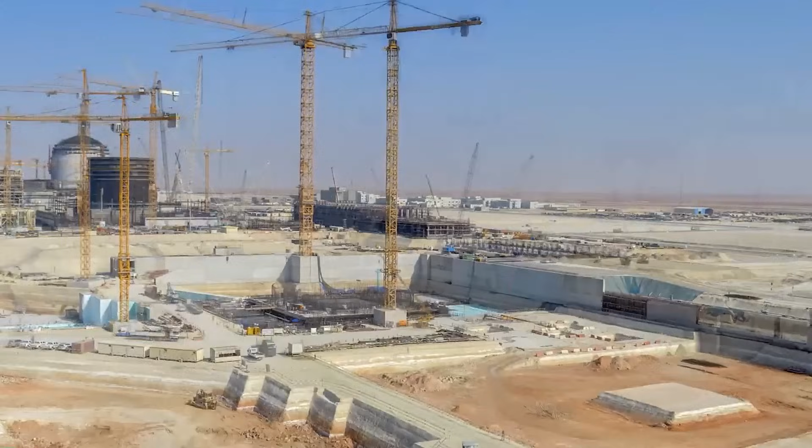These are the world's most audacious energy experiments, bold bets on technologies that could power the next century. From fusion reactors trying to capture the power of stars, to advanced nuclear plants rising in desert sands, brilliant minds are pushing the boundaries of what's possible in energy. Some will revolutionize how we power civilization. Others will teach us what doesn't work yet. But all represent humanity's boldest attempt to engineer the energy of the future. This is the story of 8 megaprojects building the energy of tomorrow.

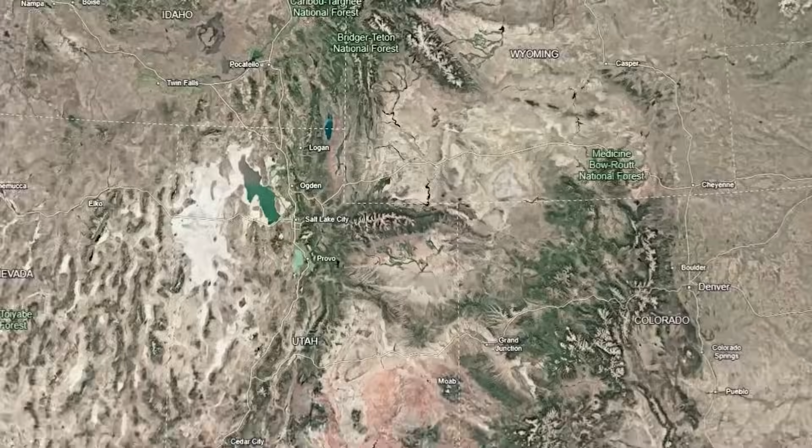And it starts with Microsoft's co-founder betting $2 billion on nuclear technology that's never been tried before. America's nuclear comeback isn't happening in a lab or on blueprints. It's happening in the Wyoming desert, where Microsoft co-founder Bill Gates is betting $2 billion on the most advanced reactor design in decades. This is TerraPower Natrium, and it's not just another nuclear plant. It's a completely different approach to atomic energy that could change everything.

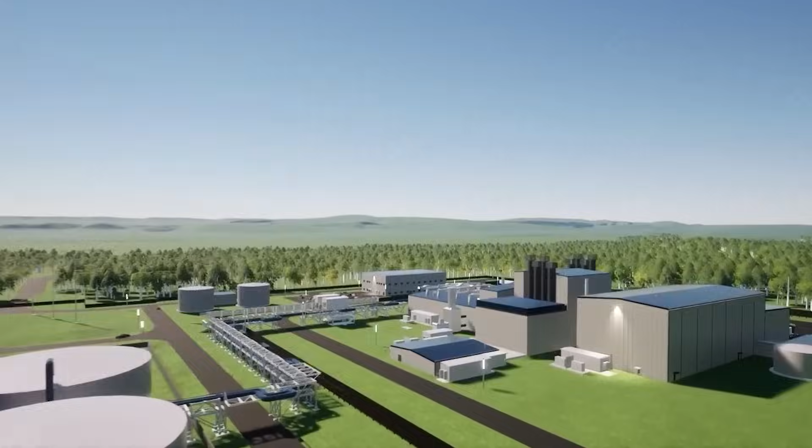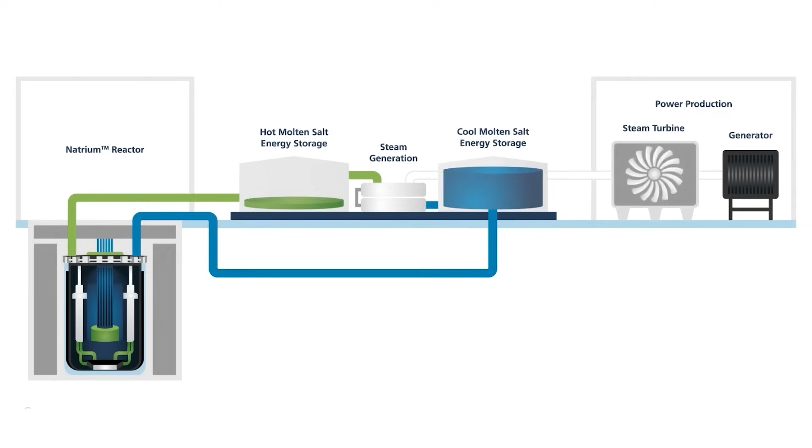While others build conventional reactors with pressurized water, TerraPower uses liquid sodium as coolant. While others struggle with energy storage, Natrium comes with a built-in molten salt battery that can store energy for hours and boost output by 50% when the grid needs it most. The reactor produces 345 megawatts normally, but can surge to 500 megawatts using its integrated storage system, like having a nuclear plant and battery system in one package.

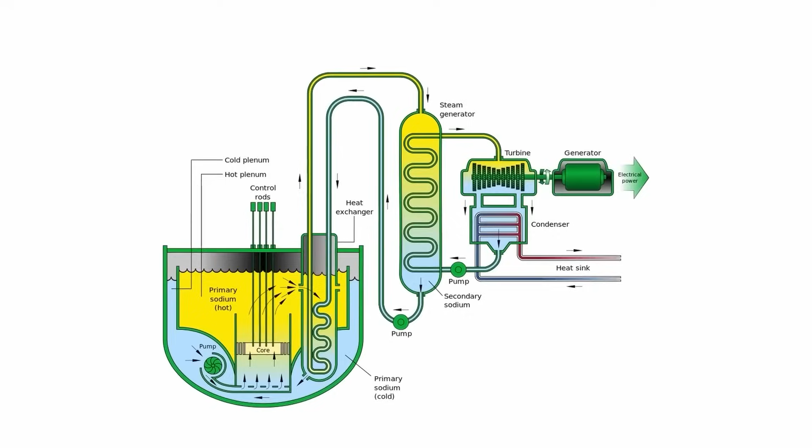Construction began in June 2024 on the site of a retiring coal plant in Kemmerer, Wyoming, a perfect symbol of America's energy transition. The same community that once powered the nation with coal will soon power it with advanced nuclear technology. TerraPower isn't just building a reactor, they're proving a concept.

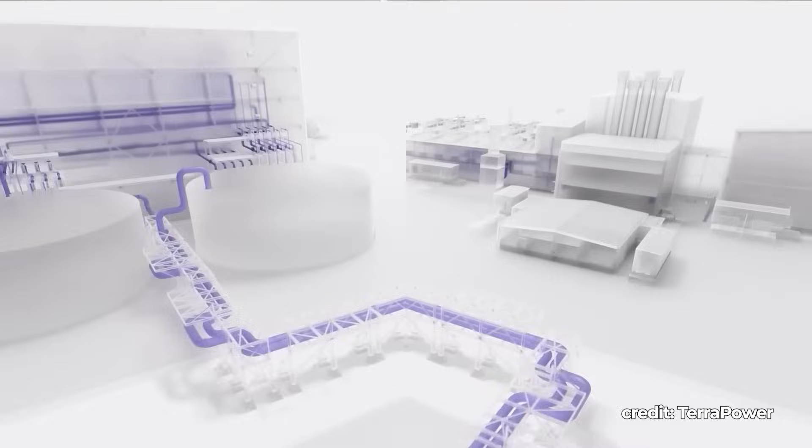Sodium coolant operates at normal atmospheric pressure, eliminating the risk of explosive steam releases. The liquid metal transfers heat more efficiently than water, and if power is lost, the system shuts down automatically without external intervention. Bill Gates has been working on this design for over 15 years, pouring hundreds of millions into research and development.

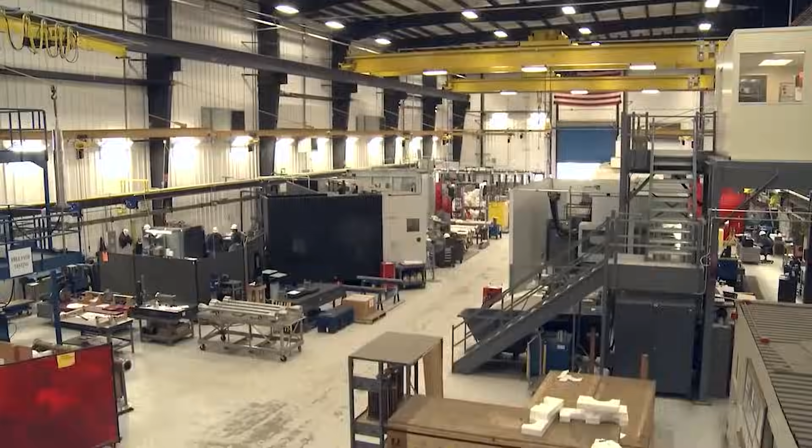The Department of Energy committed up to $2 billion in federal support. Private investors added another $830 million. But the real innovation is the business model. Instead of building each reactor from scratch, TerraPower plans to manufacture standardized components in factories, then assemble them on site. It's nuclear power meets mass production.

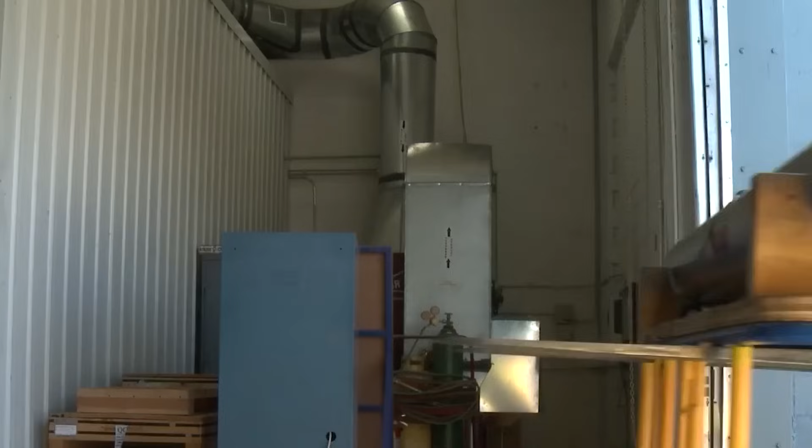If it works, Natrium won't just power 400,000 homes in Wyoming. It could become the template for replacing America's aging coal fleet with advanced nuclear technology.

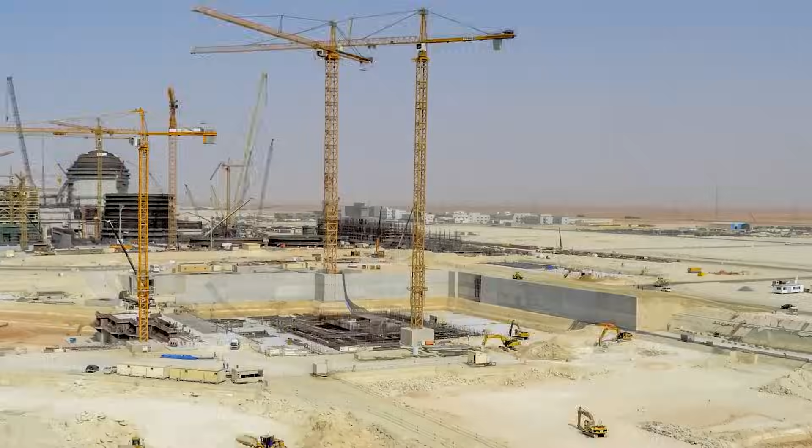While America bets big on sodium and molten salt in Wyoming, something even more extraordinary was already rising from desert sand 7,000 miles away. The United Arab Emirates built not one but 4 nuclear reactors, right in the heart of the desert during a global pandemic and ahead of schedule. This is Barakah, the Arab world's first nuclear plant and quite possibly the fastest nuclear construction project in modern history.

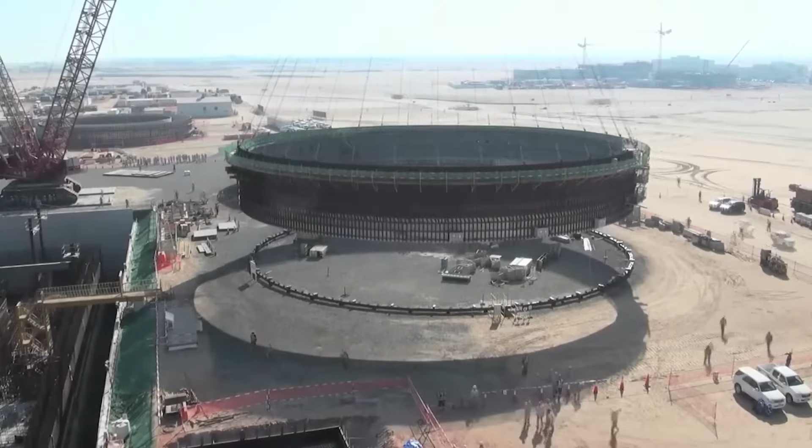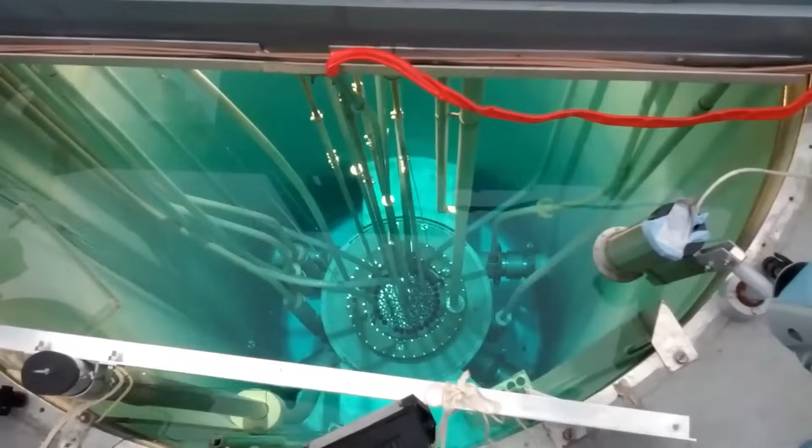But speed wasn't their only advantage. While Western nations debated policy and red tape, the United Arab Emirates went from approval to full-scale construction in under 3 years. 4 Korean-designed APR 1400 reactors, each producing 1,400 megawatts, built in the middle of a desert with cooling systems adapted to blistering heat and salty sea air. The design was chosen for reliability, not experimentation. South Korea's proven APR 1400 pressurized water reactor, a model already operating successfully in South Korea.

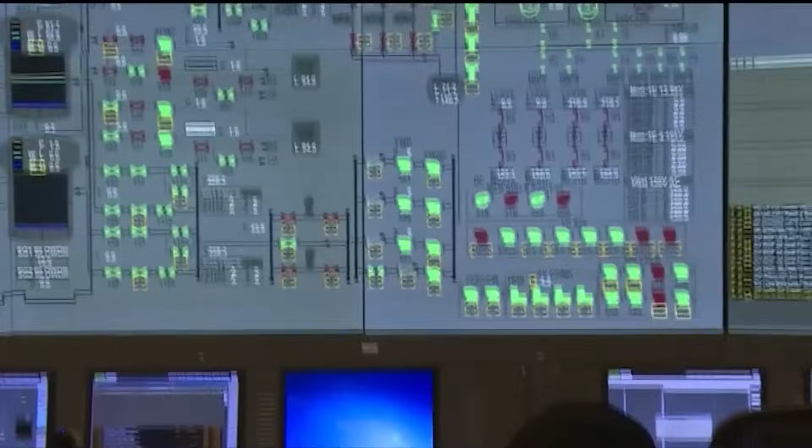Barakah's site was flattened, reinforced, and prepped in 2011. Just 2 years later, construction was already underway. Building nuclear reactors in 50 degrees Celsius heat required specialized concrete mixes, advanced cooling strategies, and careful coordination with seasonal sandstorms. Engineers had to design intake systems that could handle salt corrosion and thermal expansion in extreme conditions.

By 2020, the first unit began delivering power. Today, 3 out of 4 reactors are online, feeding electricity into a national grid once powered almost entirely by fossil fuels. The final unit is approaching completion. This isn't just about keeping the lights on, it's strategy. The UAE wants to diversify from oil, cut carbon emissions, and become a net energy exporter, not just in barrels, but in kilowatts. Barakah supplies up to 25% of the country's electricity, displacing natural gas and setting the stage for hydrogen production and water desalination.

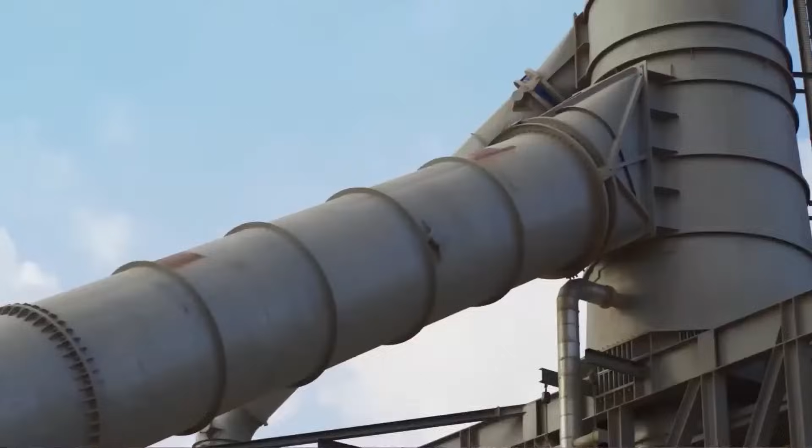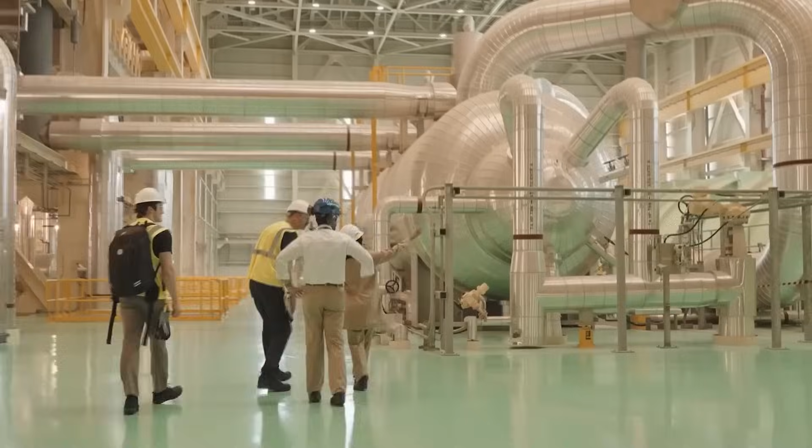Built at a cost of $24.4 billion, the plant required workforce training, regulatory cooperation with the IAEA, and building a nuclear oversight body from scratch. The UAE even sent dozens of engineers abroad for specialized training. Barakah proves nuclear can work, fast.

But what if you could make it even safer? What if you could build reactors that literally cannot melt down? China thinks they have the answer, and it involves something the West threw away 50 years ago.

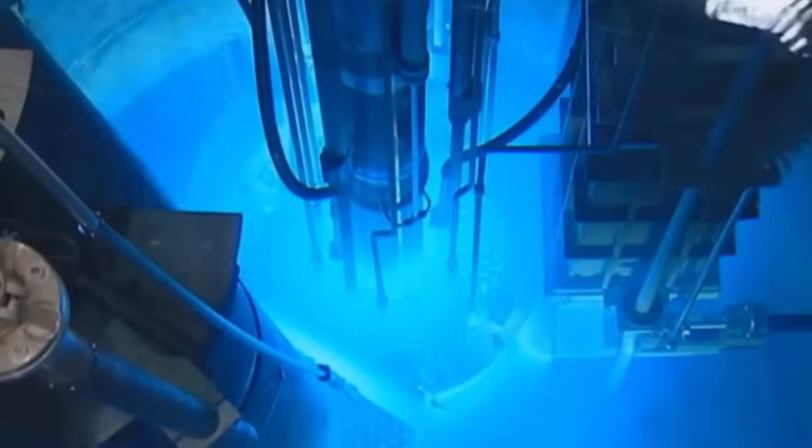Hidden in China's western desert sits a reactor that doesn't look like any other nuclear plant on Earth. No giant cooling towers, no pressurized water. Instead, it runs on molten salt and an element America tried in the 1960s and abandoned.

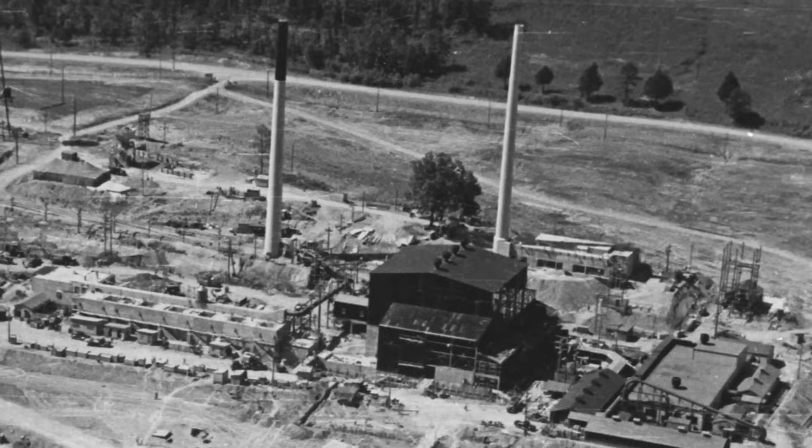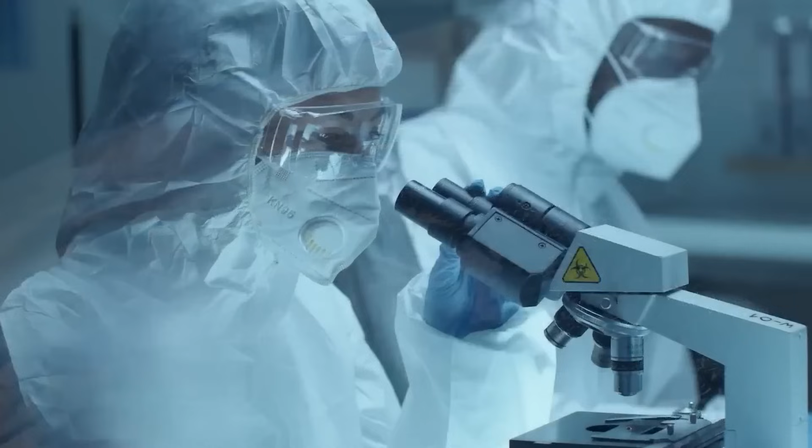If this tiny prototype works, it could make every other reactor in the world obsolete. But there's a catch, one that killed the technology once before. In the deserts of Gansu province, far from China's megacities and coastal power plants, sits TMSR LF1, a small, unassuming reactor tucked into the highlands of Wuwei. It doesn't look like a revolution, but it might be one.

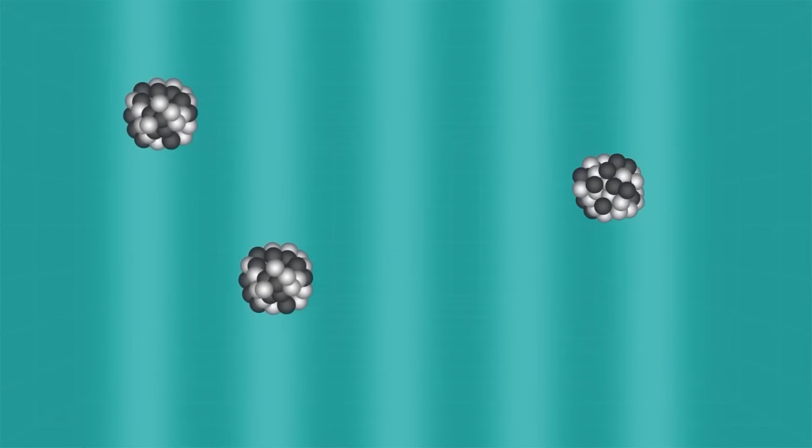Instead of uranium rods submerged in pressurized water, this prototype uses molten salt as both fuel and coolant. The fuel, thorium mixed with enriched uranium, is dissolved directly into the salt. If it works, it won't need a massive water source. It won't melt down. And it could run on thorium, an element China has in abundance.

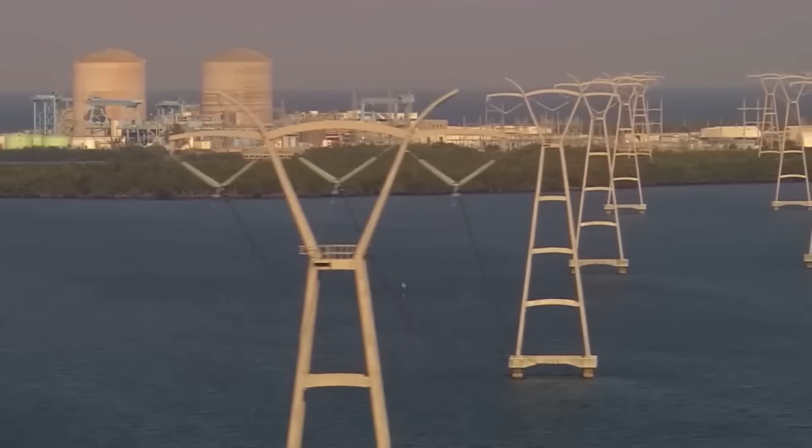It's not China's biggest reactor. It's not even connected to the grid. But in terms of long-term strategy, it's one of the country's boldest energy plays. Because if they can make molten salt reactors viable, they could reshape nuclear energy from the ground up. Safer, cleaner, and immune to the water wars that plague conventional plants.

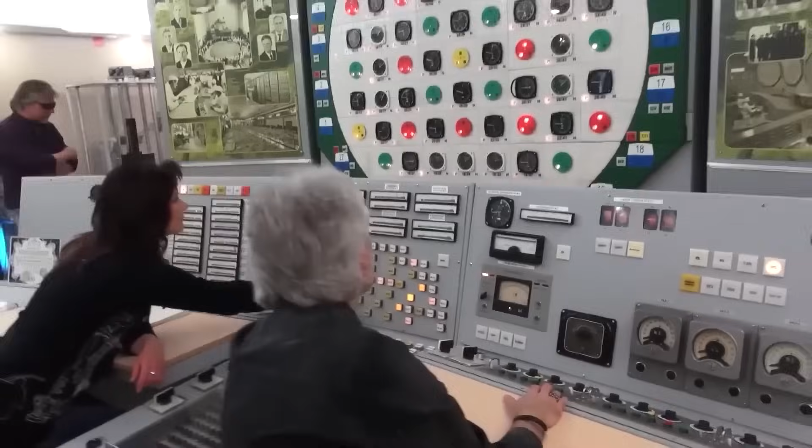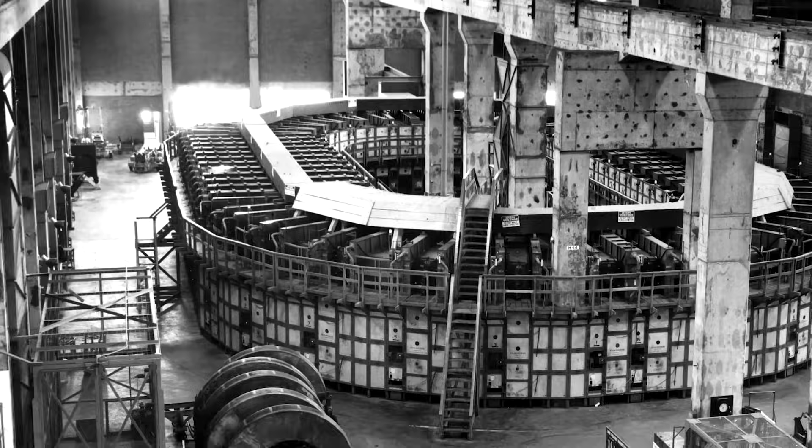But here's the risk. Molten salt designs have been tried before. The US built one back in the 1960s at Oak Ridge. It worked briefly and was shelved. The salt corroded the pipes. The complexity overwhelmed the engineers.

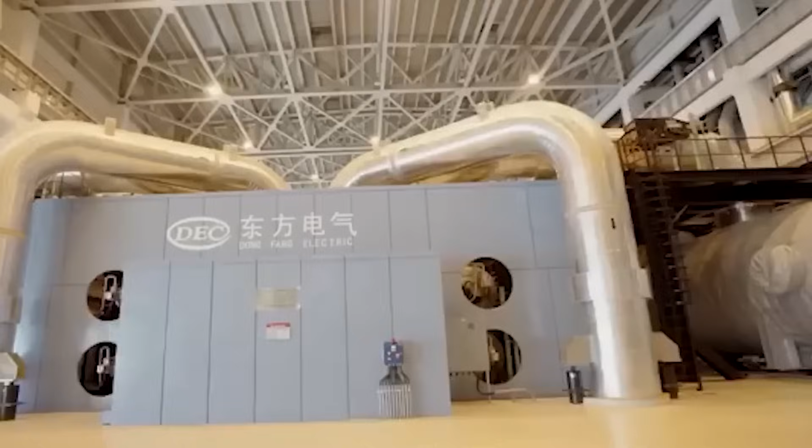The world moved on. Now, China's picking up where others left off, betting that better metallurgy, advanced sensors, and centralized planning can finish what others abandoned. The first version of TMSR LF1 began testing in 2021. It's tiny, just 2 megawatts, but it's a testbed for something much bigger: a 373-megawatt commercial reactor already under development.

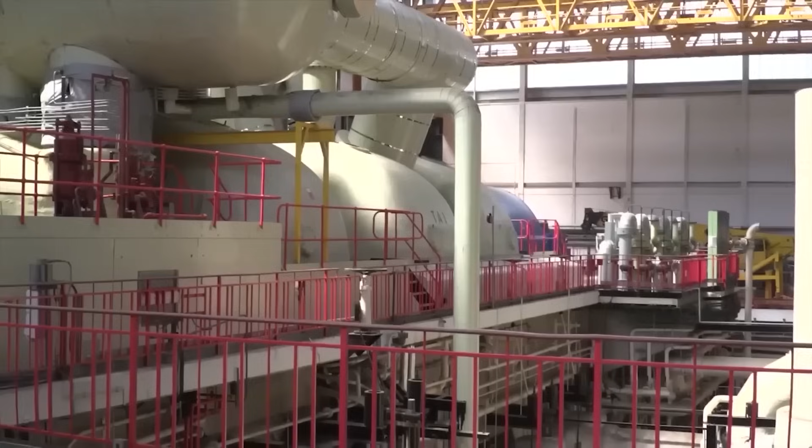Success here would give China a foothold in next-gen nuclear, one that doesn't rely on uranium imports, sprawling cooling systems, or Western technology, one that fits neatly into their broader energy roadmap: secure, scalable, and exportable. But if molten salt reactors seem impossible, what we're about to see next is trying to bottle the power of stars themselves. And the price tag? It'll make China's experiment look like pocket change.

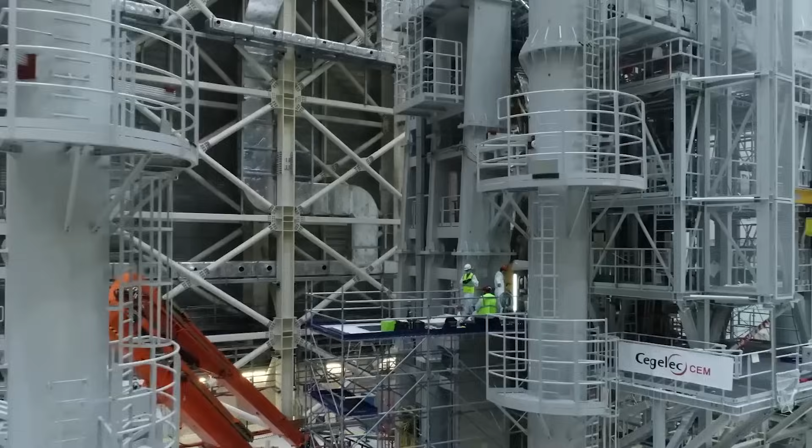What if I told you that right now, in southern France, 35 countries are building a machine to hold plasma 10 times hotter than the sun? Not in space, not in a lab, but in a steel chamber the size of a cathedral. This is ITER, the most ambitious scientific project in human history. It's already cost over 25 billion euros. It's a decade behind schedule, and it might be humanity's best shot at unlimited clean energy.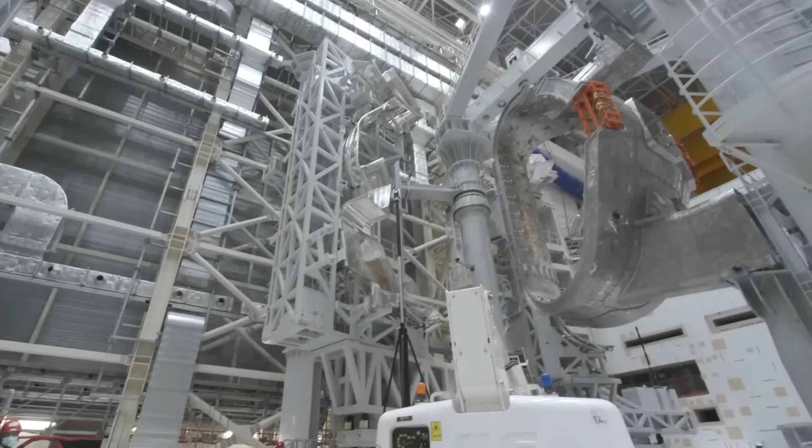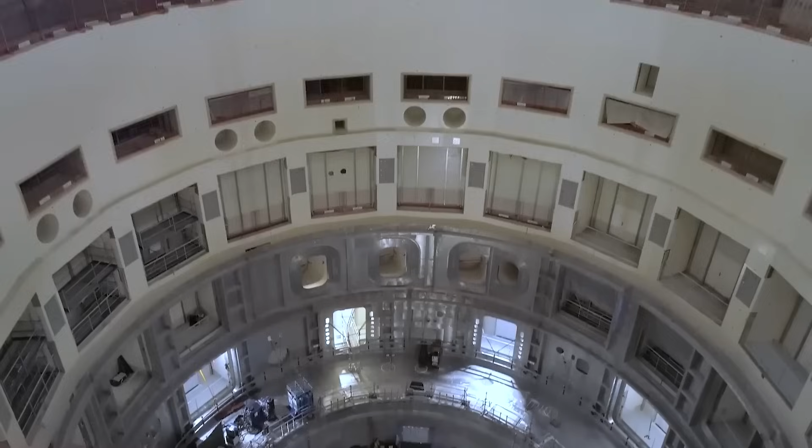What if you could hold a star in a steel jar? That's the dream, burning quietly in southern France, where the largest fusion reactor on Earth is coming to life. It's called ITER, Latin for 'the way,' but its path has been anything but smooth. Beneath its 73-meter steel building lies the heart of an idea humanity has chased for over 70 years: nuclear fusion, the same process that powers the stars.

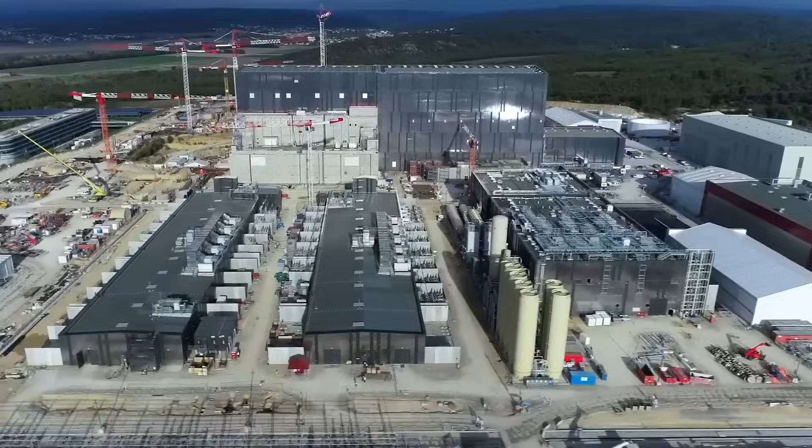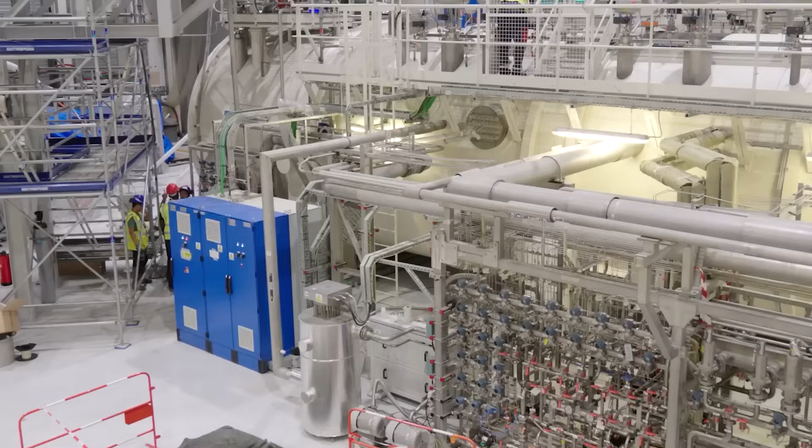A fire that doesn't burn fossil fuels. That leaves no long-lived radioactive waste. That can't melt down or be weaponized, if it works. ITER isn't just a reactor, it's the largest scientific collaboration in human history. 35 nations, including China, the US, Russia, and the EU. Built with over 10,000 tons of superconducting magnets, cooled to colder than outer space. 1 million components shipped from all corners of the world, assembled like a cosmic jigsaw puzzle with millimeter precision.

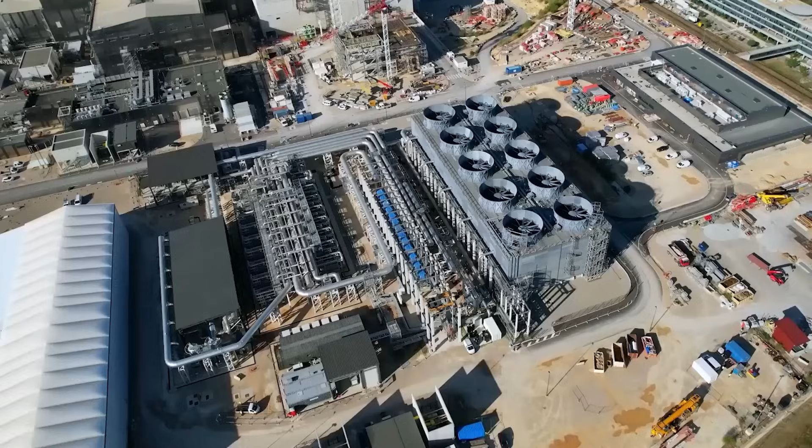But here's the tension. ITER doesn't generate electricity. It's an experiment. A 25 billion euro bet that we can confine plasma at 150 million degrees Celsius in a magnetic field, long enough to prove fusion is viable at scale.

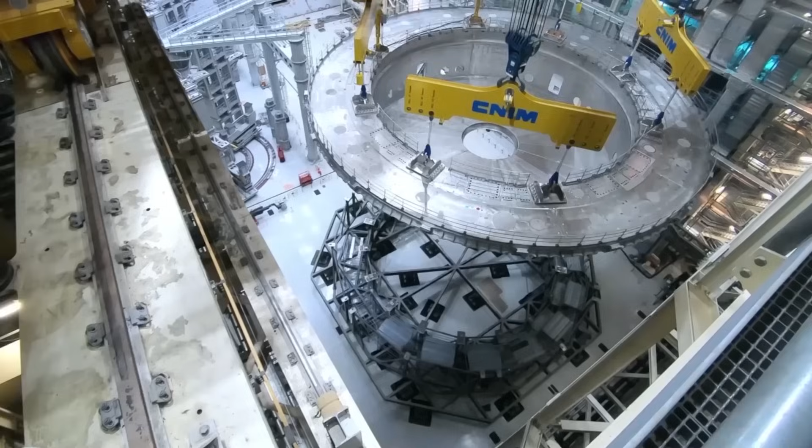Inside the complex, workers are racing to finish the reactor's core, called a tokamak, a donut-shaped vacuum chamber where hydrogen will be heated to 10 times the temperature of the sun's core. That heat will force atoms to fuse, releasing massive amounts of energy. At least that's the theory. No fusion reactor has ever produced more energy than it consumes. Not once.

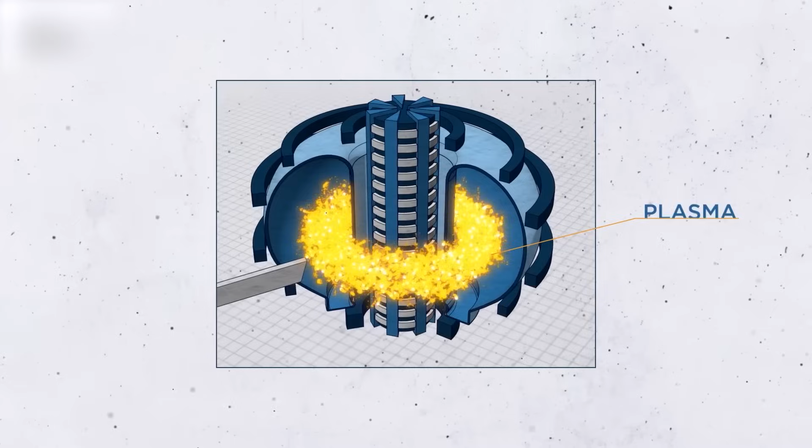ITER aims to be the first, producing 500 megawatts of fusion power while consuming only 50 megawatts to sustain the reaction. The engineering challenges are staggering. The tokamak weighs 23,000 tons, as much as 3 Eiffel Towers. The superconducting magnets must be cooled to minus 269 degrees Celsius, while containing plasma at 150 million degrees Celsius just meters away. The margin for error is zero.

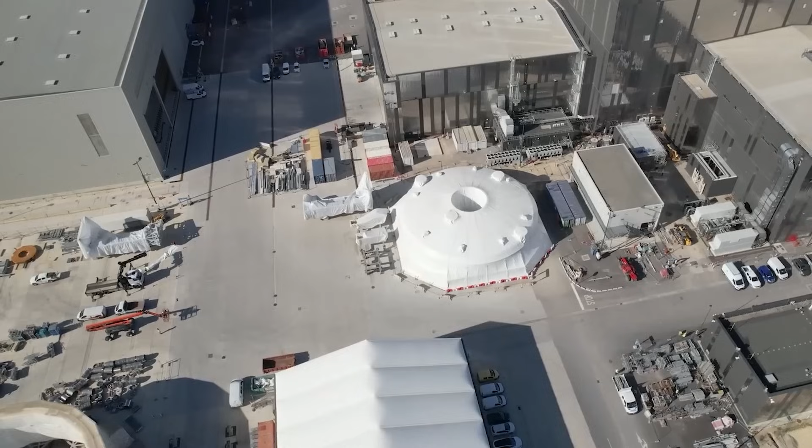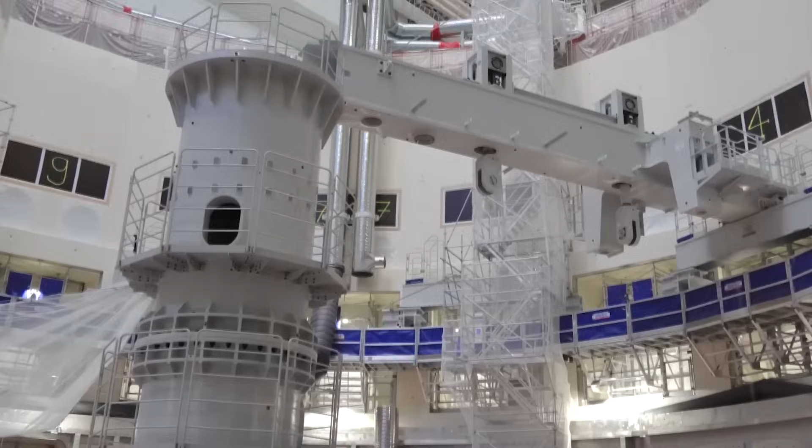And the pressure is building, technically, politically, financially. What was supposed to be operational in 2016 is now expected to begin first plasma tests around 2034. Critics call it a monument to delay. Supporters call it the moonshot of energy. But if ITER works, even once, it could mark the beginning of a post-carbon civilization, a world powered by hydrogen, not oil, by physics, not combustion.

While ITER chases the impossible, others are making the difficult look easy, including one project that's tunneling under the ocean floor. On England's coast, workers are boring tunnels deep beneath the seabed, not for trains or cars, but to cool the most expensive nuclear project in European history. This is Hinkley Point C, a £46 billion gamble on nuclear power's future in Britain.

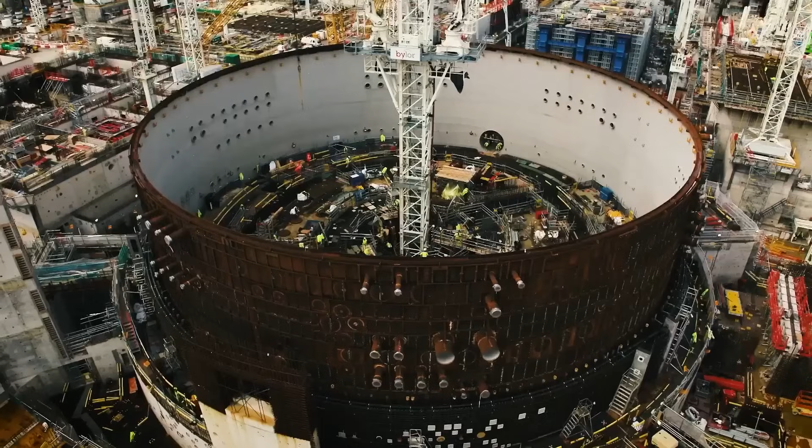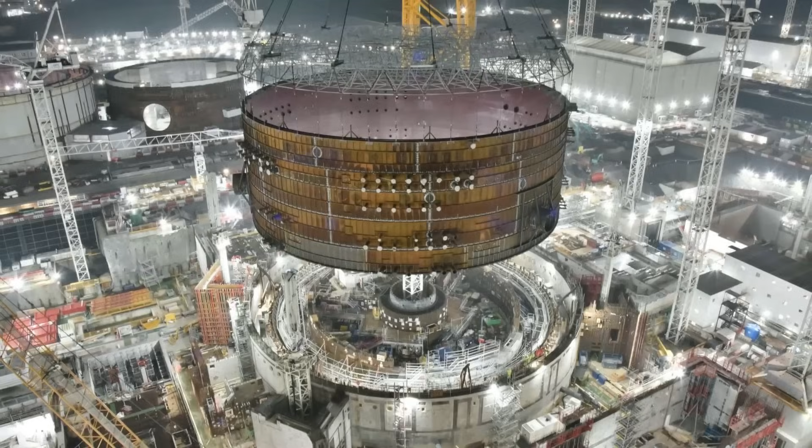And if the price tag doesn't get your attention, the engineering will. On the coast of southwest England, two massive reactor buildings are taking shape. What started as a £16 billion build has ballooned to nearly £50 billion. The deadline? Now pushed to 2031, more than a decade later than first promised. Hinkley is being built with the European Pressurized Reactor (EPR) design, the same technology used in China's Taishan plant. Each unit is rated at 1,630 megawatts. Together, they'll produce enough electricity for 6 million homes.

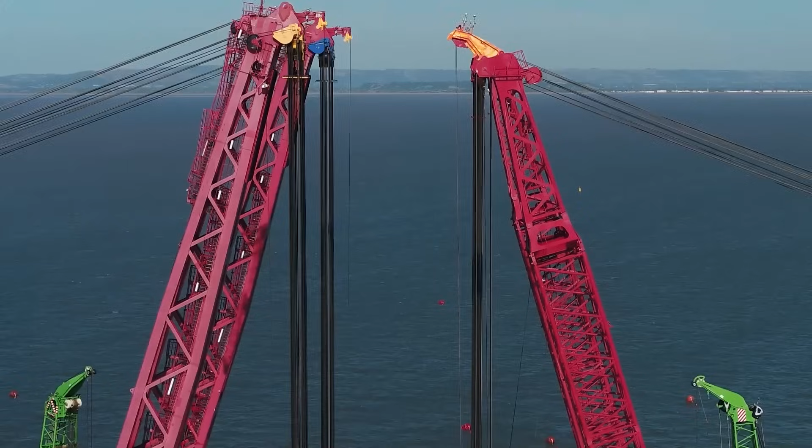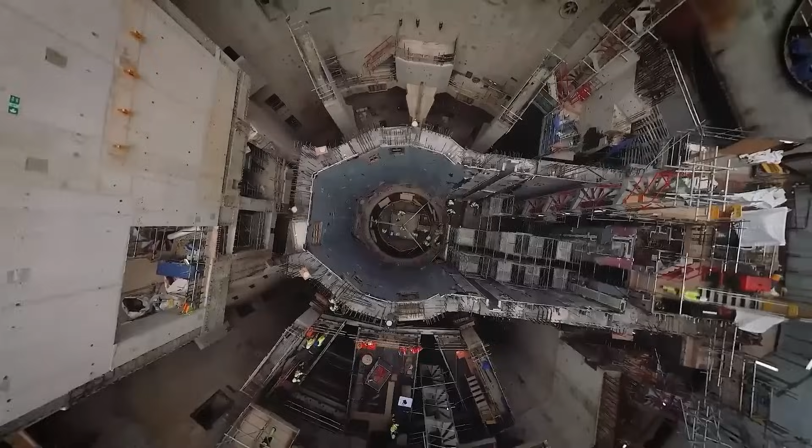But the real engineering marvel is hidden underwater. To keep the reactors cool, engineers are tunneling 5.5 kilometers beneath the Bristol Channel seabed, the largest excavation project in UK history. Seawater will flow through these massive underwater pipes, creating one of the most complex cooling systems ever attempted.

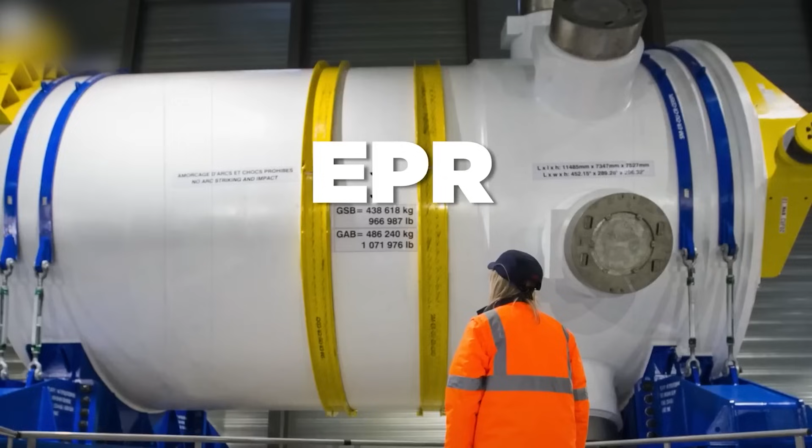Construction has faced challenge after challenge: COVID shutdowns, skilled labor shortages, Brexit-related delays, and rising materials costs. But the biggest challenge has been the EPR design itself, powerful but notoriously difficult to build. Similar projects in Finland and France have faced similar delays and cost overruns.

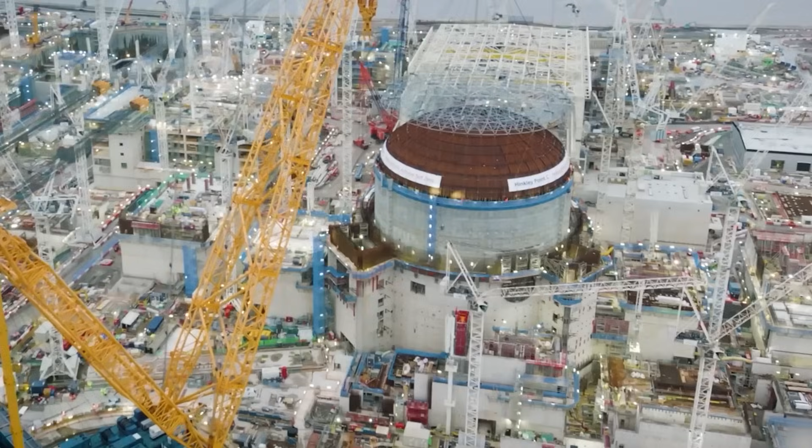Still, the strategic case is clear. The UK is shutting down its coal plants. North Sea gas is drying up, and wind and solar can't always fill the gap. Hinkley's 3.2 gigawatts of steady nuclear power could become the backbone of Britain's energy future.

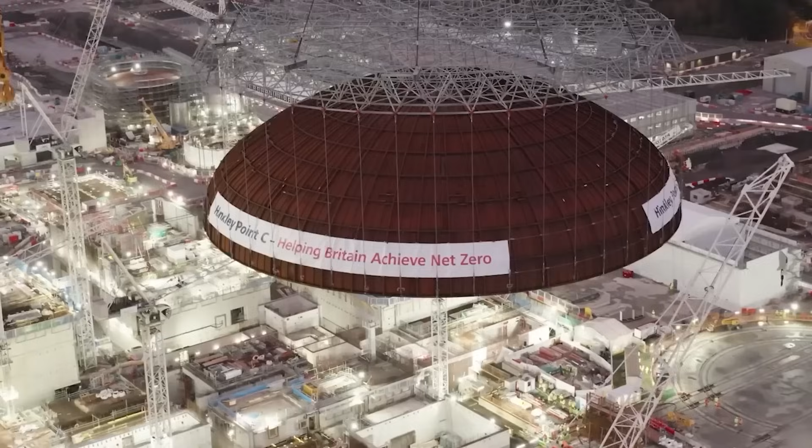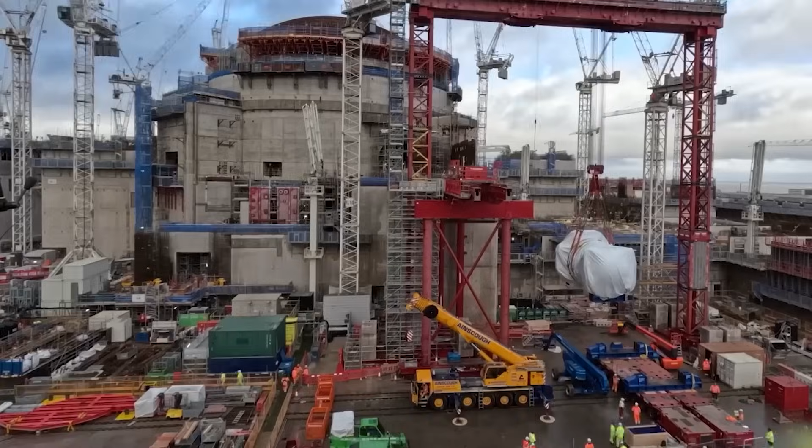More than 10,000 workers are now on site. Huge prefabricated pieces are being lowered into place by some of the largest cranes in Europe. And even as critics raise alarms over the cost, the UK is already planning a sister project, Sizewell C, based on the same blueprint. Hinkley is a gamble on scale, complexity, and persistence. But if it succeeds, it could prove that nuclear power still has a future in post-carbon Europe.

But what if you didn't need to build on land at all? What if your nuclear plant could float anywhere in the world? Russia has an answer, and it's already switched on. Floating in the Arctic Ocean, powering a Russian town that's literally at the end of the world, sits something that sounds like science fiction: a nuclear reactor on a barge.

It's called the Akademik Lomonosov, and it's the world's first operational floating nuclear power plant. Why? Because this part of Russia is vast, remote, and nearly impossible to power through traditional means. Lomonosov was Russia's answer: a mobile reactor that could be built in a factory, floated to a site, and plugged into the grid. No roads, pipelines, or fuel trucks required.

The plant holds two KLT-40S pressurized water reactors, similar to those used in Russian nuclear icebreakers. Together, they produce 70 megawatts of electricity and 50 megawatts of heat, enough to power a town of 100,000 people while providing heating during brutal Arctic winters.

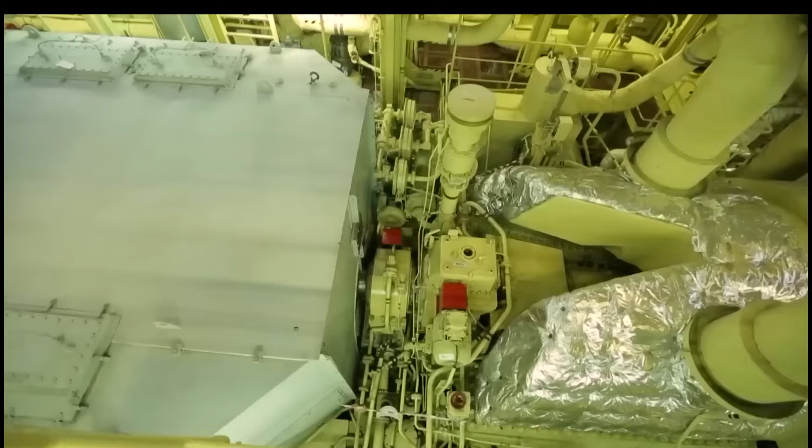Building it wasn't easy. The idea was first approved in 2006, but construction delays, rising costs, and global criticism slowed progress. The Lomonosov wasn't fully deployed until 2020, after being towed more than 4,000 kilometers from St. Petersburg to the Arctic Ocean port of Pevek. The engineering challenges were unique. The reactor had to operate in temperatures reaching minus 50 degrees Celsius, withstand Arctic storms, and provide power to a grid at the edge of civilization.

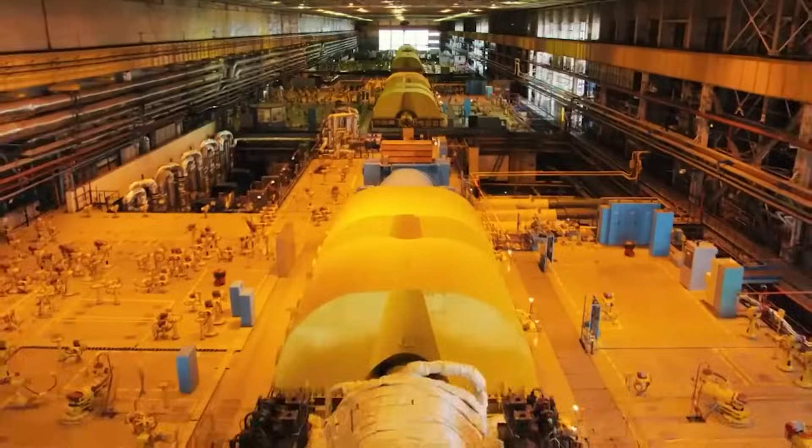The barge-based cooling system designed for marine conditions represents a completely different approach to nuclear engineering. Construction cost came in at around $232 million, and Russia is already planning more floating plants to replace aging diesel generators across the far north.

The design has sparked international debate. Supporters call it a model for delivering clean energy to remote or disaster-hit areas. Critics worry about nuclear accidents at sea, but Russia isn't waiting for consensus. Lomonosov has been operational for over 4 years, proving the concept works.

This floating reactor may preview what's coming, especially as countries look to power remote outposts, offshore facilities, or even space missions. In the Arctic, Lomonosov isn't just an experiment. It's already keeping the lights on.

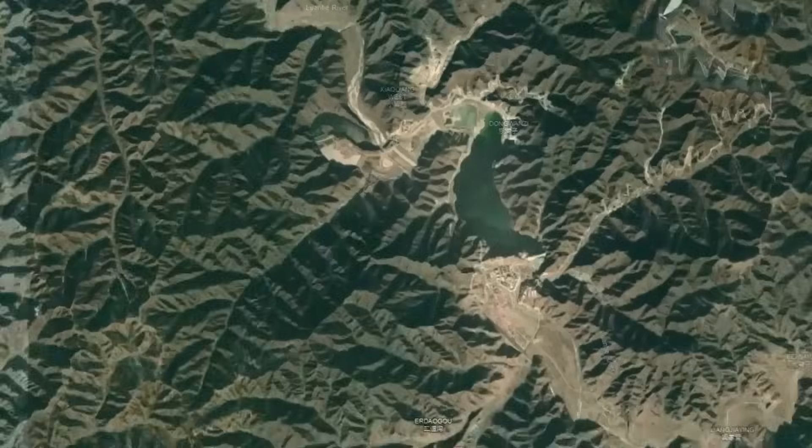Floating reactors might seem extreme, but they're nothing compared to what happens when you turn an entire mountain into a battery. North of Beijing stands the world's largest battery. It doesn't use lithium, it doesn't use chemicals. It uses something humans have known about for centuries, but never at this scale. This is Fengning, and it's rewriting the rules of energy storage using nothing more than water and gravity.

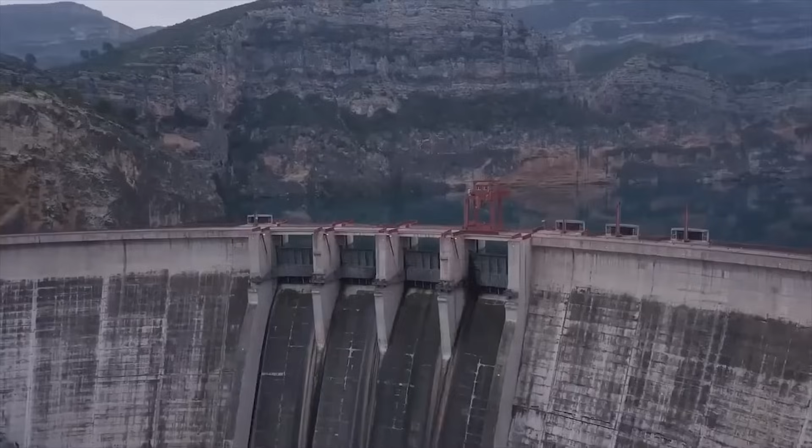The concept is elegantly simple. When China's solar panels and wind farms produce more power than the grid can handle, Fengning stores it. Water is pumped uphill to a man-made reservoir carved into the mountainside. When demand rises, that water is released downhill, spinning 12 massive reversible turbines and sending power back into the grid.

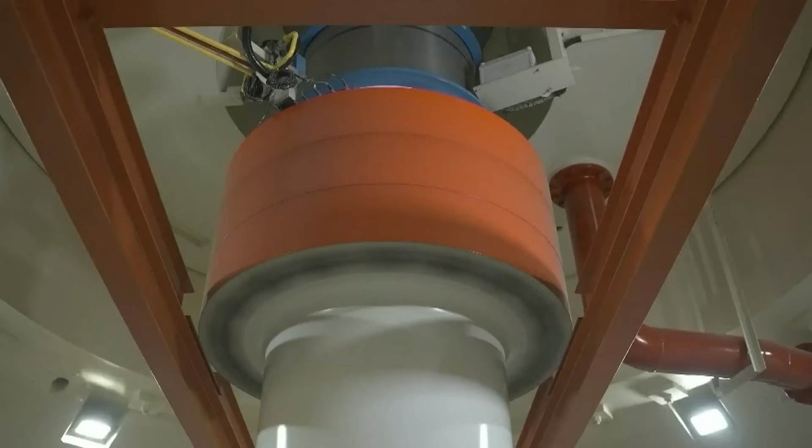Construction began in 2013 and took nearly a decade to complete. Engineers blasted tunnels through solid rock, built 2 massive reservoirs at different elevations, and placed most of the machinery deep underground. The site was chosen for its height difference, stable geology, and direct access to Beijing's high-voltage transmission lines.

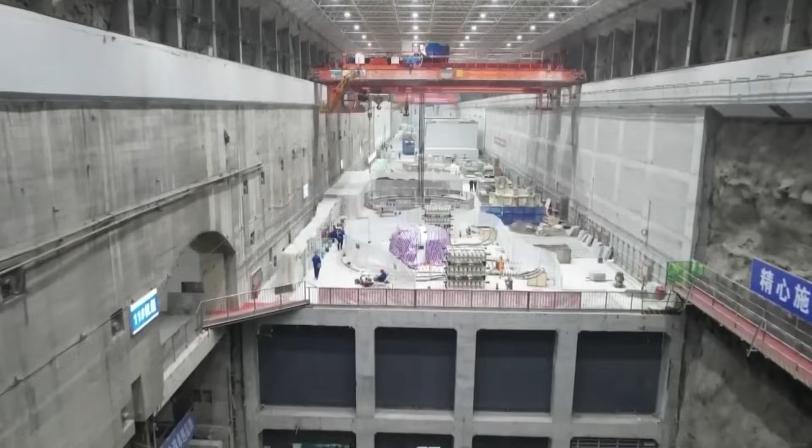Fengning can generate 3,600 megawatts, enough to power a small country. But more importantly, it helps China's energy grid stay stable. It smooths out the dips when solar production drops. It fills in the gaps when wind dies down. It acts as a shock absorber for a grid increasingly dominated by variable renewable energy.

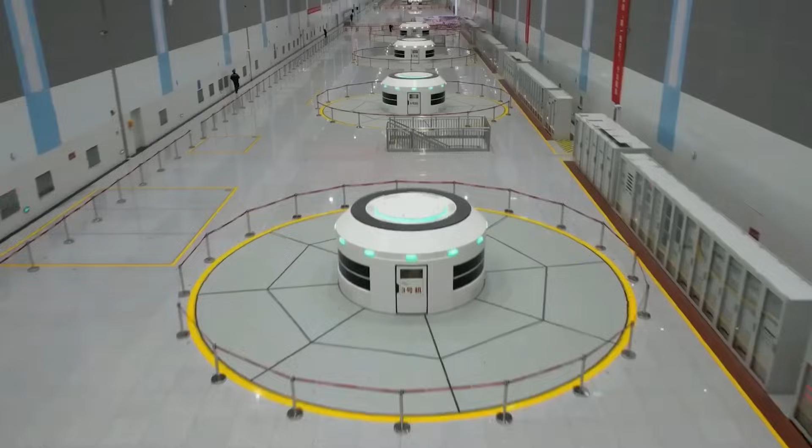The cost? Just under $2 billion. But for China, this isn't a one-off project. It's a blueprint. Dozens more pumped hydro facilities are being planned as part of their renewable energy strategy.

The scale is staggering. The upper reservoir holds 67 million cubic meters of water, enough to supply Beijing for months. The underground powerhouse, carved from solid rock, houses turbines the size of buildings.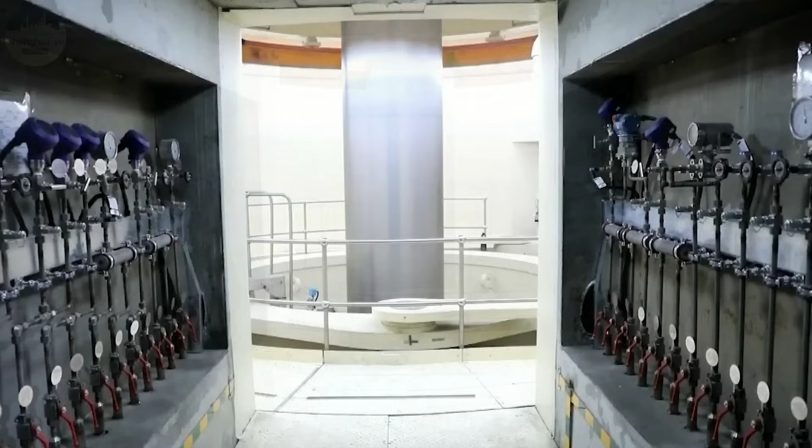Fengning doesn't look like a battery. No sleek panels or gleaming towers. Just 2 lakes connected by underground channels with water moving up and down like the tide. No fuel, no emissions, no rare earth minerals. Just gravity, engineering, and scale.

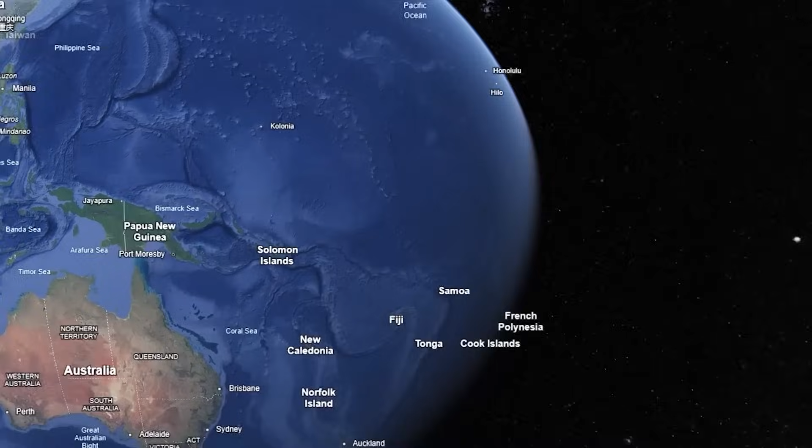While China moves mountains to store energy, our final project proves that sometimes the most powerful forces are the ones we barely notice. In New Zealand, they're tapping into something that's been burning for millions of years. Not coal, not gas, but the Earth's own fire, rising silently from volcanic heat deep underground.

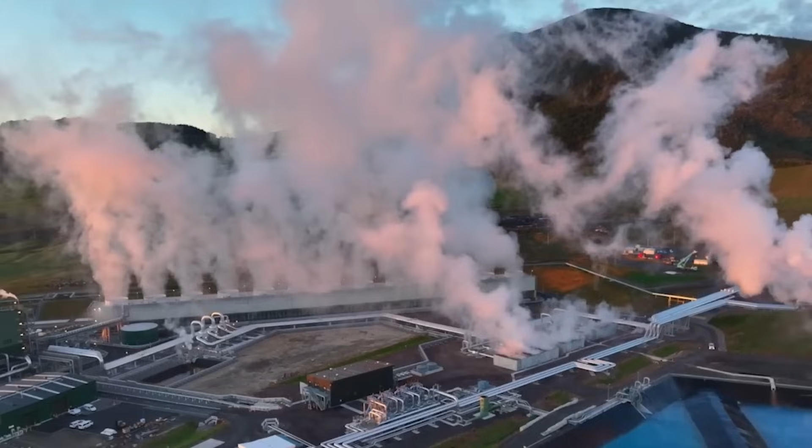Outside Taupo, on New Zealand's North Island, steam rises naturally from the ground, not from industry, but from the planet itself. Here, the Tauhara geothermal plant taps into a vast underground steam field fed by volcanic activity. Geothermal energy isn't new, but what's happening in New Zealand is different. The Tauhara project, completed in 2024, represents precision engineering applied to one of Earth's oldest energy sources.

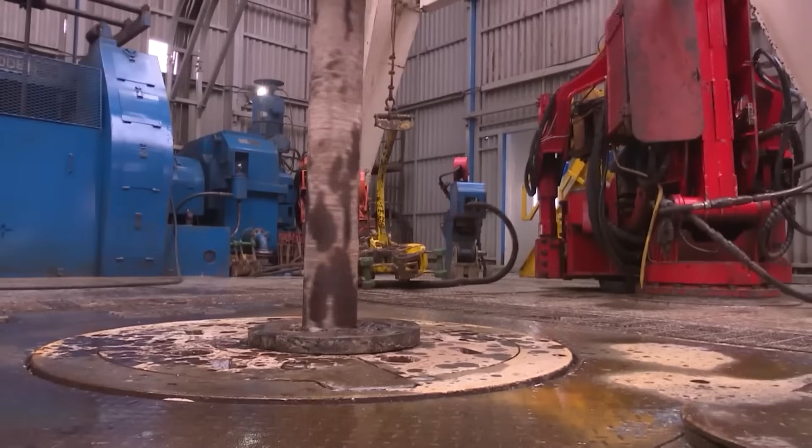At its heart is a 152-megawatt facility that uses controlled drilling, closed-loop steam systems, and reinjection wells to ensure the heat source never runs dry. Engineers had to carefully map underground reservoirs thousands of meters below the surface, balancing steam withdrawal with long-term sustainability.

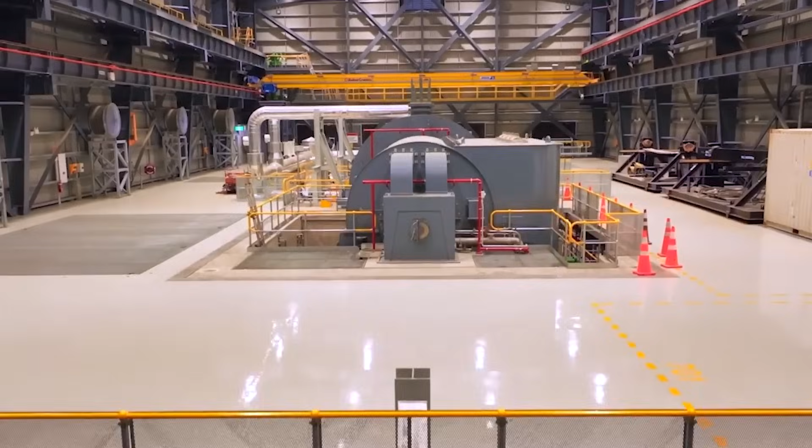The entire system is designed to return used water back underground, where it's naturally reheated for continuous use, like a rechargeable battery beneath your feet.

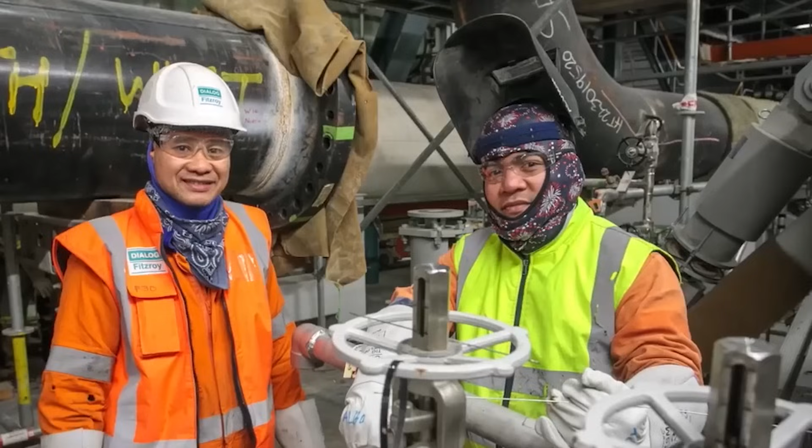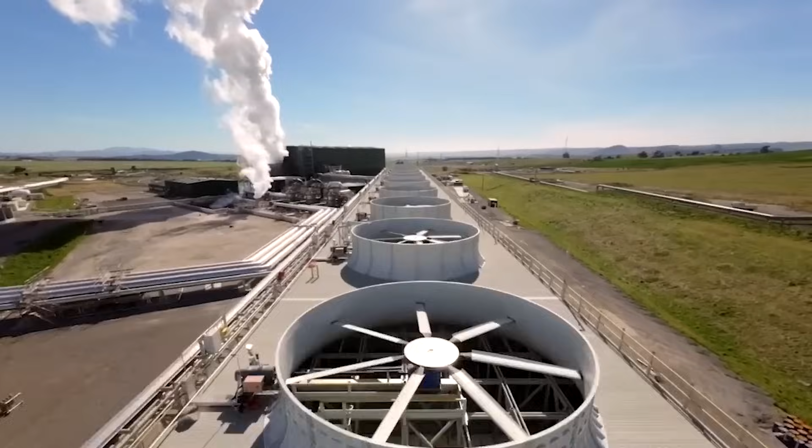But this isn't just about engineering. It's also a cultural effort. The project works closely with local Maori iwi groups, ensuring traditional land rights are respected while sharing the energy benefits with local communities. The Tauhara plant now supplies clean baseload power to hundreds of thousands of homes, with 0 emissions and no fuel supply chain.

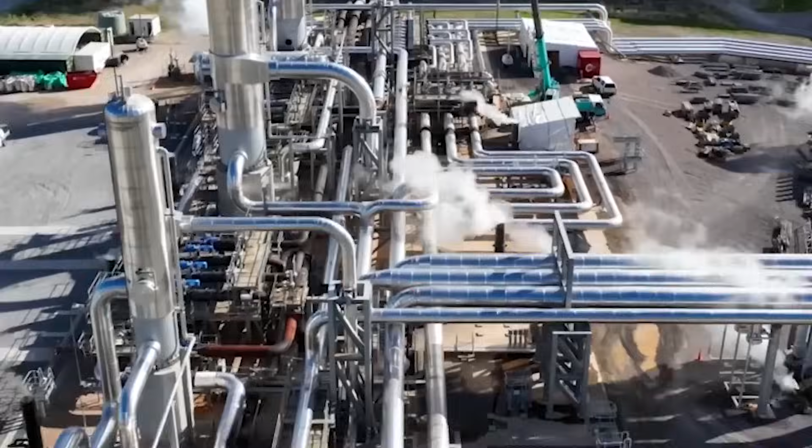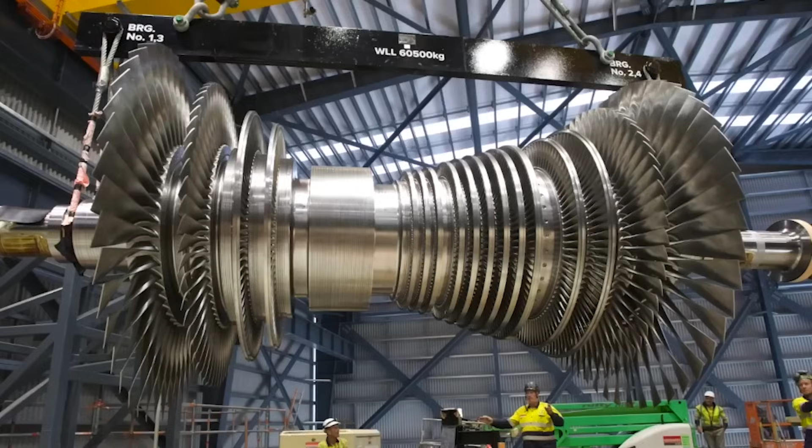Unlike wind or solar, geothermal runs 24/7, regardless of weather. It's renewable energy that never stops. New Zealand already generates more than 17% of its electricity from geothermal, one of the highest shares in the world. And with more volcanic zones mapped and ready for development, it's quickly becoming a global model for clean, reliable baseload power. No steel domes, no reactor cores, no floating barges, just pressure, steam, and one of Earth's oldest forces, rising quietly from within, powering the future with fire that never burns out.

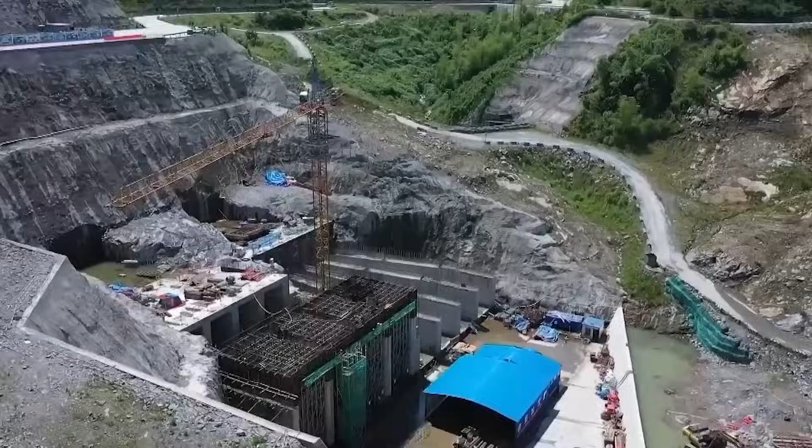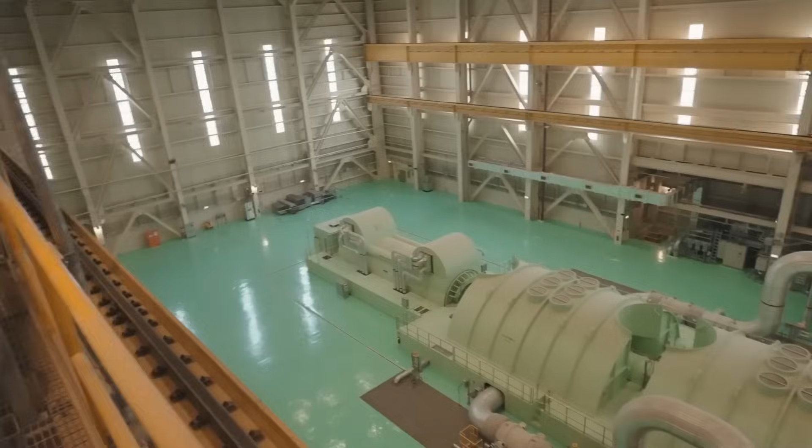They tunnel through mountains, float through ice, and draw power from molten rock, splitting atoms and spinning gravity into electricity. Some are live, some are stalled, a few may never work. But together, these megaprojects aren't just chasing energy, they're chasing the future itself. A world where power doesn't come from what we dig up, but from what we engineer. From fusion's impossible fire to gravity's reliable pull, from thorium's quiet promise to geothermal's ancient heat, the race to power tomorrow is already underway. And the winners won't just light up cities, they'll light up centuries.